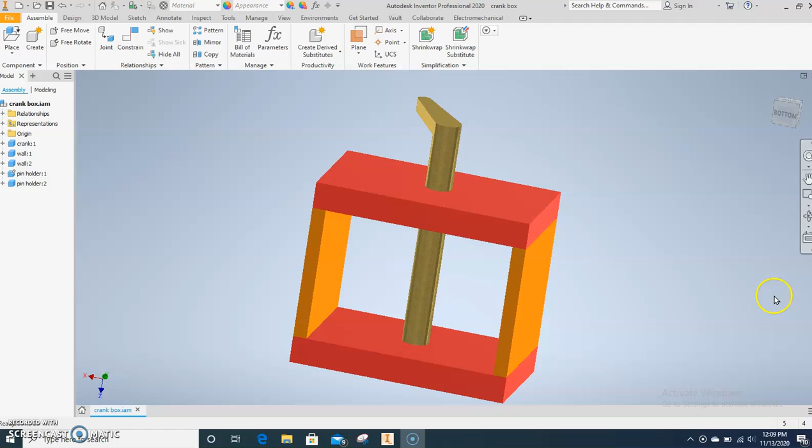Okay, welcome to part 2 of the crank box. In this one you're going to learn how to put all these together as well as make this thing spin.

Okay, so here's how you start off. File, New. But this time I need you to open up a different one. You're going to open up the standard in.iam.

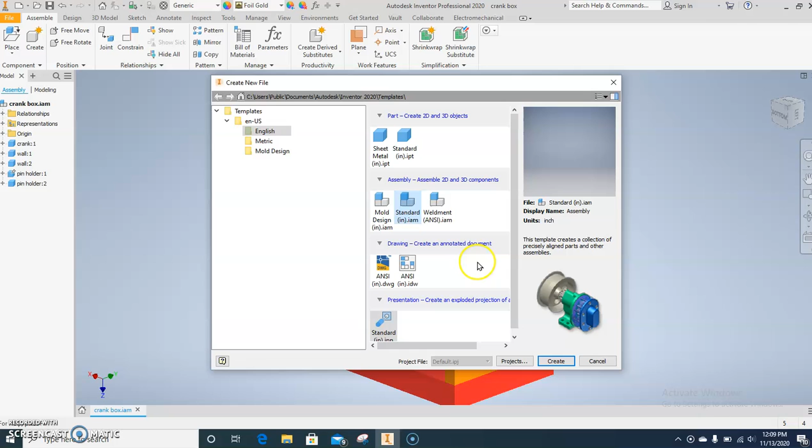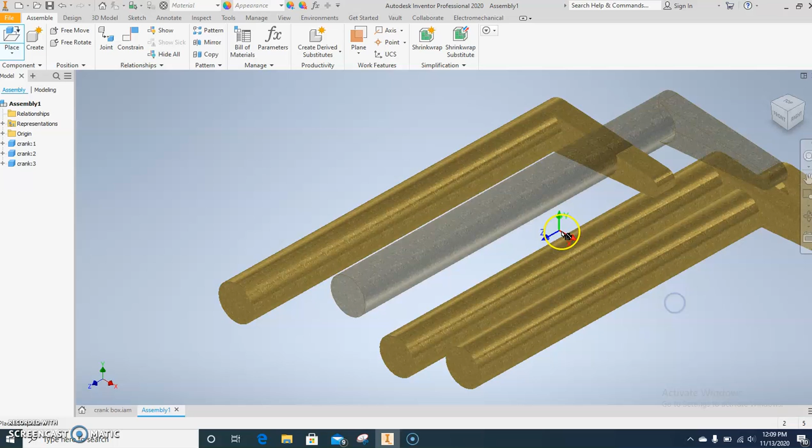Take a moment to load. Okay, next you hit place. Go find your files, so the first one, crank. Just dump it once. Every time you click it'll add a new one, so pretty much you could add an infinite amount of these, but I don't want to.

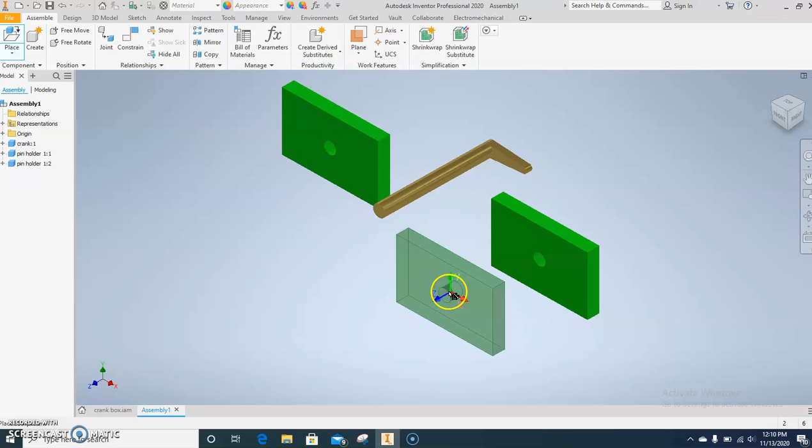I just want one. If you accidentally add an extra one, just click it and delete. Okay, place again. Pin holder, or crank holder, whatever we called it on yours. There's one or two depending on the class. Dump 2 of these here. In fact, I'll take one and maybe move it down here. And then place 2 walls. Where did I put that? There it is.

Wall, wall. Okay, so as you look at this for the very first time, you have to learn how to visualize how objects are going to go together. Now, you may think this is very remedial, but it can be kind of difficult when you're not putting together with your hands, but with a computer and a set of different functions.

So, as of right now, if you try to grab the crank, you'll see it goes to the object. It doesn't recognize surfaces unless you tell it to. Okay? So there's 2 main things that you will use: mate and flush.

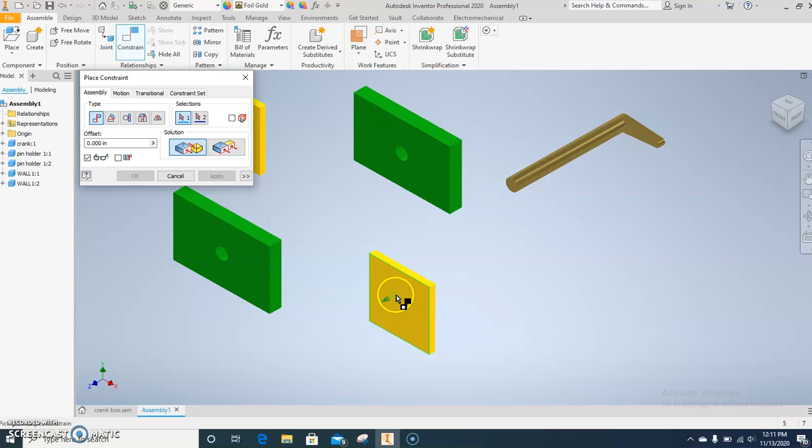So if you click on the constraint button right here, you see that you have 2 options. One is mate and one is flush. Mate will bring 2 parts together. Flush will align sides, okay?

But first, before we get started, it's always wise to ground something. So click on an object, right-click, and ground it. Now this one can't be moved. You see a little pin by it. That means it's stuck.

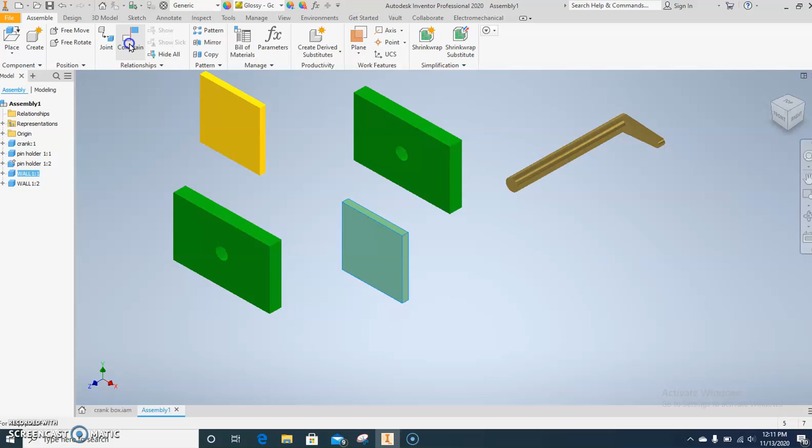First thing I want to do is grab a wall, and we're going to rotate the wall to where it's aligned with this side right here. So choose the constraint button, choose flush. Now you want to zoom in, don't be really far out here. You want to click the side of this and the face of this. You'll hear a popping sound. Now these 2 are aligned with each other. Choose apply.

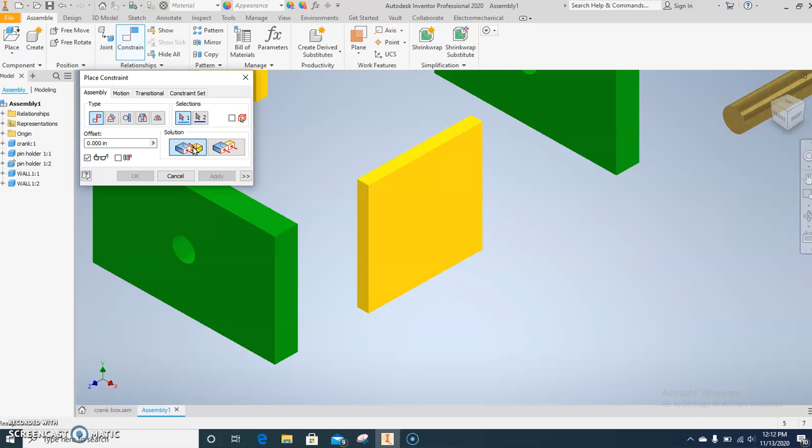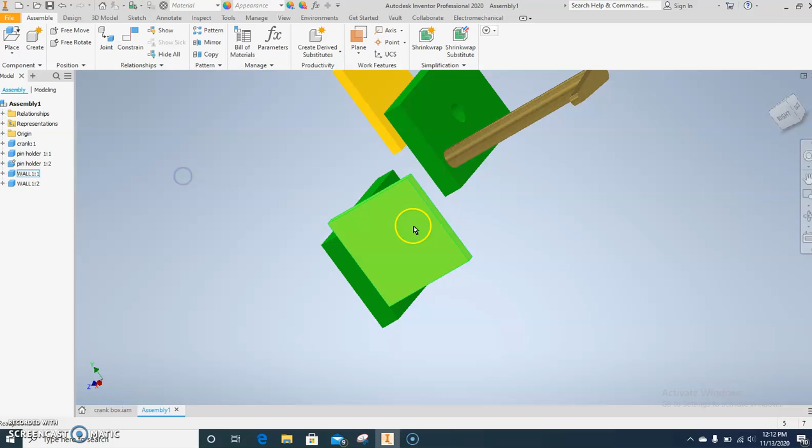Okay, next let's mate it. I think this will be easier doing it this way, that way you can see how they go together. Okay, you're going to zoom in. If you're zoomed out, you can't see it. Click the bottom of this. Press Shift, hold scroll, move your screen around slowly. Then choose the bottom of this. You'll see how it lined it up. Choose apply. Now if I press cancel, you'll see how it's staying right on that.

So guess what you have to do next? Flush these 2 sides. Now, don't just leave it there and line it up because that's not accurate, you have to flush it. So choose flush, choose side, and apply. And press cancel. Now you'll see here how I can't move that, and neither can you.

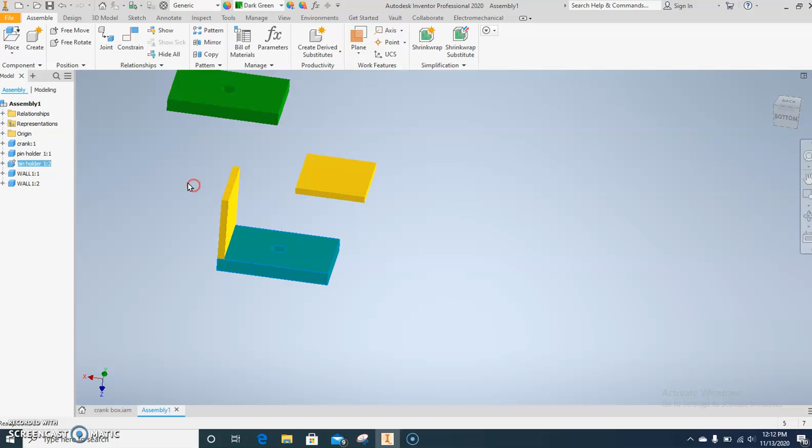We're going to do the same thing on the other side. So press on the constraint button, flush. Choose the face of this. Now I have to go over here because I want to see the side here, and this side right here. Once I click it, it will align it. Press apply.

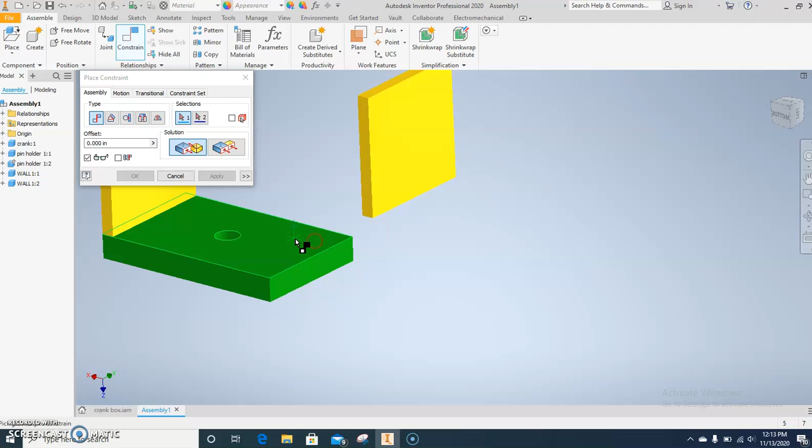Mate the top of your base here. I have to shift under because I need to see this part, since I'm putting together this part here and this part here. Okay, now once I do that, it's on there regardless of how I want it. I didn't realize I have Green Bay Packer colors here.

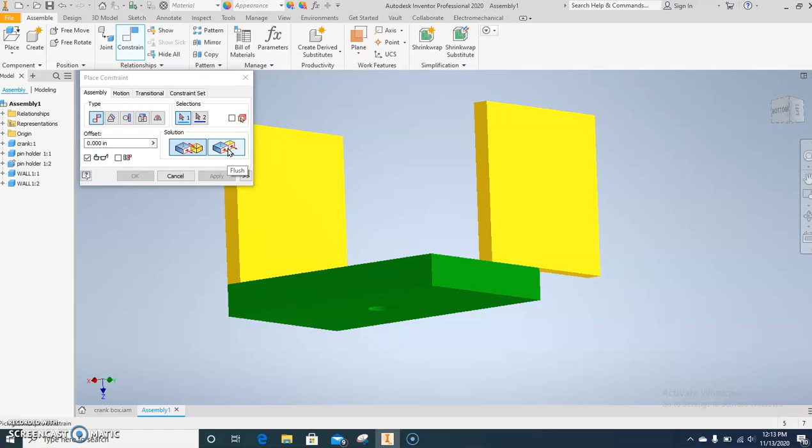Flush this side, flush this side. Now they're both together, you see that? Okay, one more, and that's this one here.

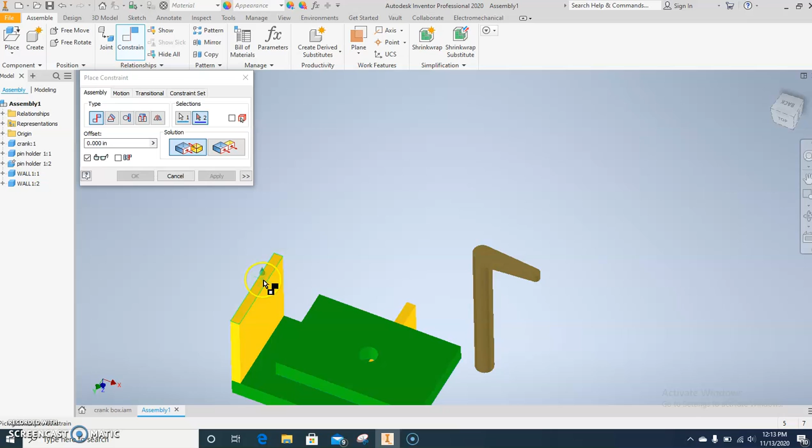This one I'm going to start a little different than the last one. I'm going to mate first—mate the bottom of this and the top of one of these two. It doesn't matter which one because it's level, and it will pop onto it. Apply.

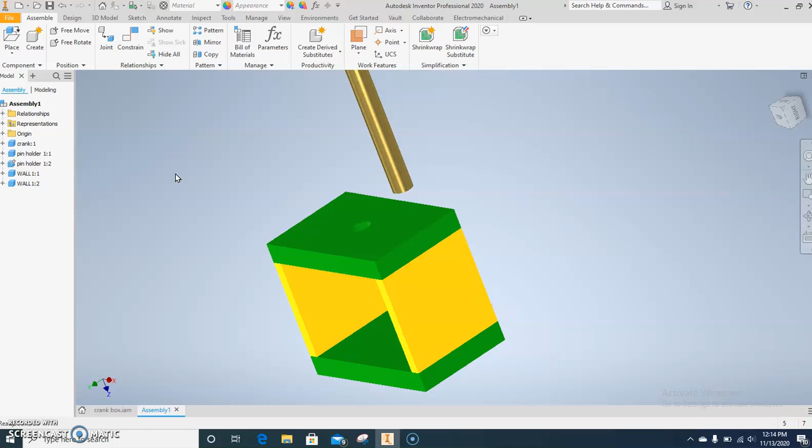Flush is next. Flush the side of this, and apply. Then flush the side of this, and the side of this, and apply. You're done. So hopefully you got that, and hopefully that wasn't too fast. I hope you were able to see how they line up.

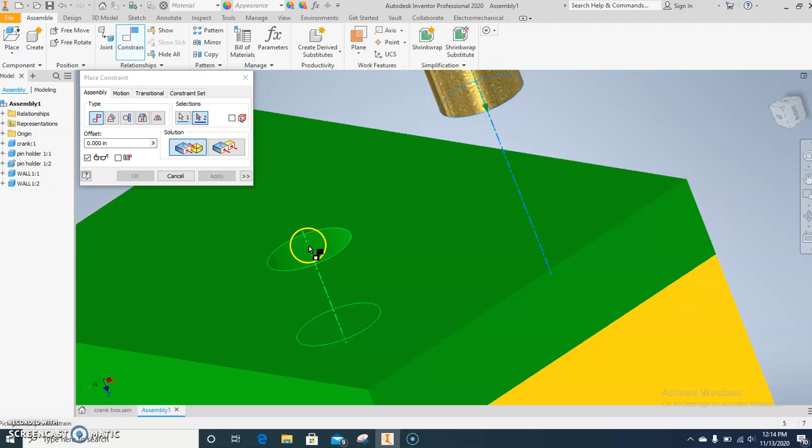Okay, the last thing is this crank right here. To do this one, choose the constraint button, choose the side of this, and you'll see a long dotted center line that goes through it—click that first. Then zoom in on these holes. You want to find a match with that line by clicking on the side or surface of this hole right here. If you click and apply, it will slide it in there.

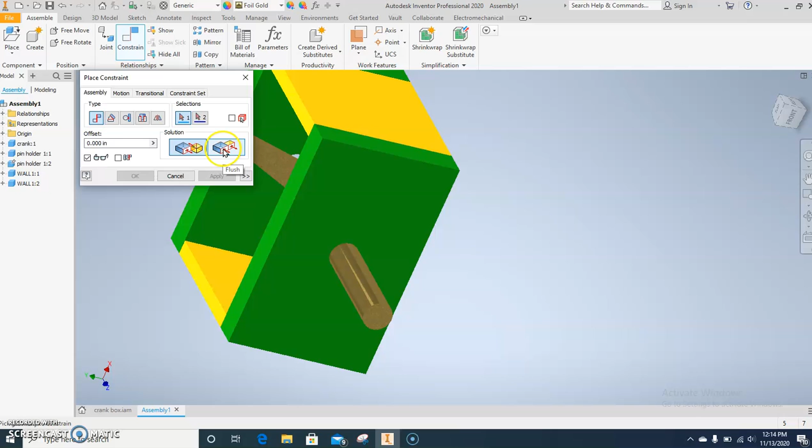Now I'm going to press cancel just so you can see how it's moving up and down. I'll put it down like this because there's one final step, which is to flush it with the bottom here. Choose the constraint button, choose flush, click the bottom of this, choose apply, choose cancel. You are done, that's it, that's all you had to do.

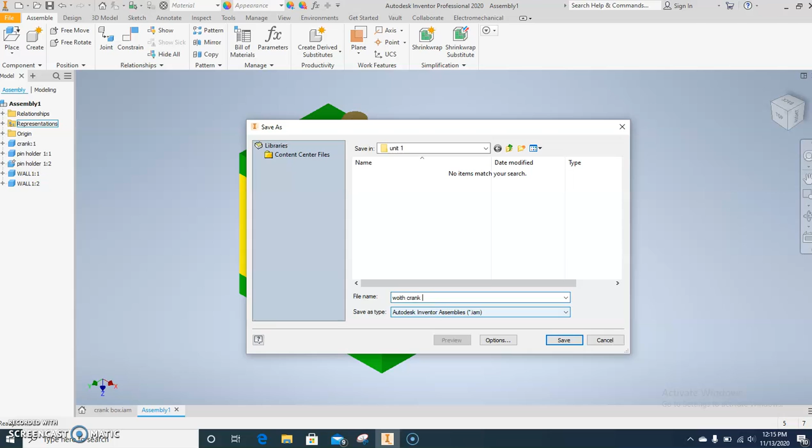Okay, so let's save this. Save as your last name, Crankbox. Now that's set and ready to roll. I'm not getting those errors up because these parts are saved into another part too. Okay, so this part's done.

I'm going to show you one more quick thing. File, New, and then once you go down here to standard .ipn, hit Create.

It will immediately prompt you to open up a file as soon as you start this. So go find your file that you just saved. This made my life harder. There we go, that's where it was—Crankbox. It's a different color because, like I said, I made a lot of these this week.

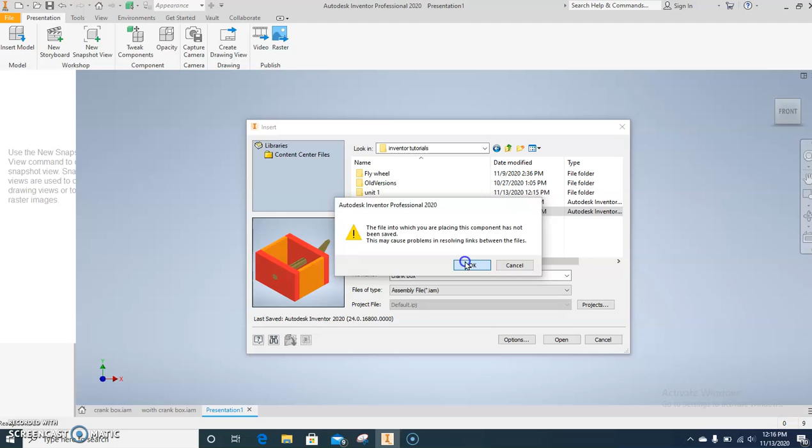Okay, there we go. Now I usually like to hit one of these corners here to start this off, just because it makes a nice little view. Okay, you hit tweak.

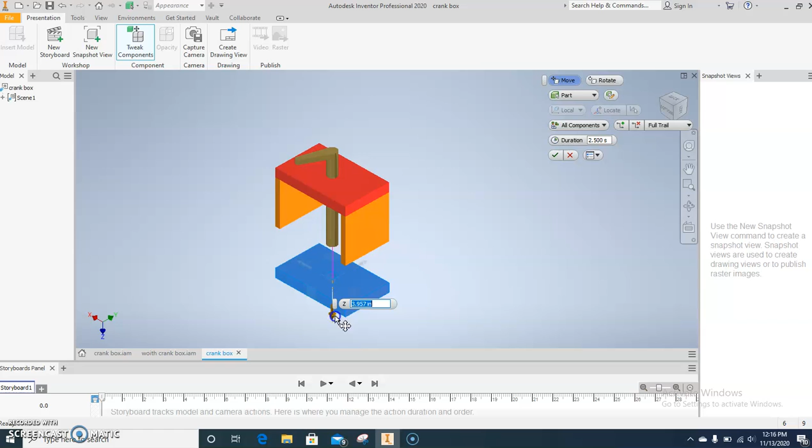Let's say I want to click on this bottom here—you get a series of arrows. I want to pull it down, so just grab it and drag it down. I don't care how far. Okay, go ahead and click this wall here, drag this, move it out. Click this one here, drag it, move it out.

I'm going to click the crank last, drag this and move it up. Press the check mark, you're done. All you have to do now is watch the magic happen—you made this little animation.

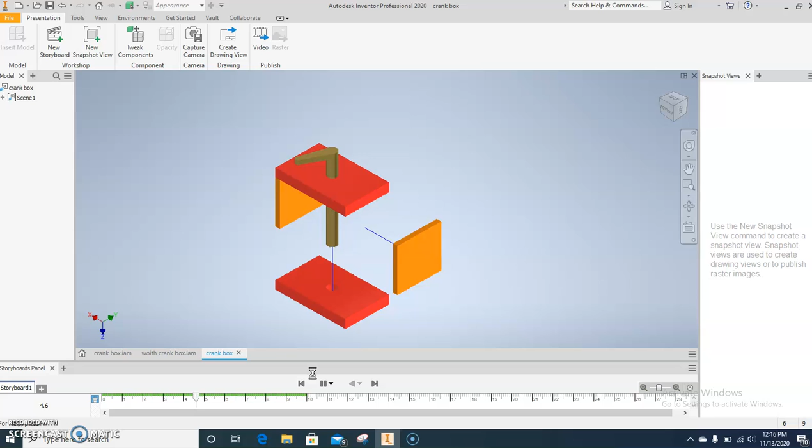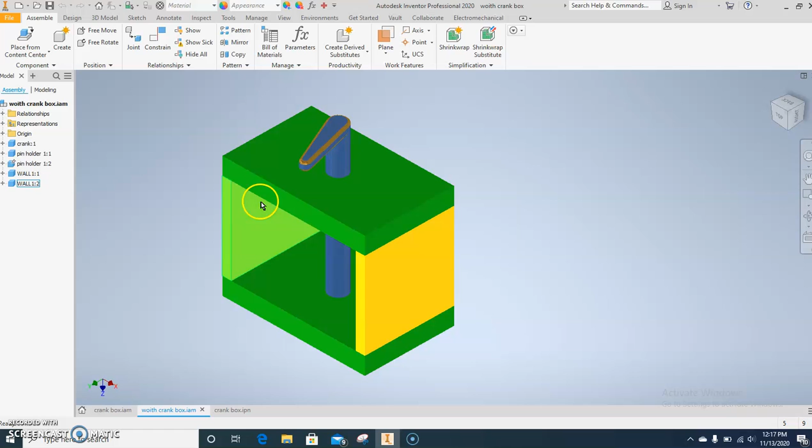Job well done. Okay, once you're finished, I would like you to turn in this file here, as well as your crank box here with all the parts. So you're actually going to turn in 5 things: this piece, the 2 boxes, the assembly, and this. So 5 total files.